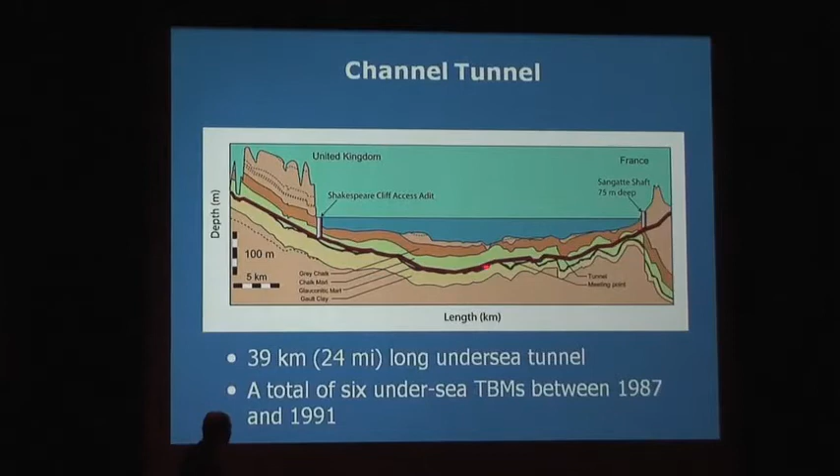I'm going to talk about the Channel Tunnel because I spent a lot of time in France and England making what was really a very, very treacherous and very difficult project come through actually on the original schedule, having started late. But this shows that we have other geologic sections, but it was a 39-kilometer tunnel under the sea, and then there were sections of the tunnel under the cliffs on each end which were not under the sea. So our machines had to do this section here, both from the British side and the French side.

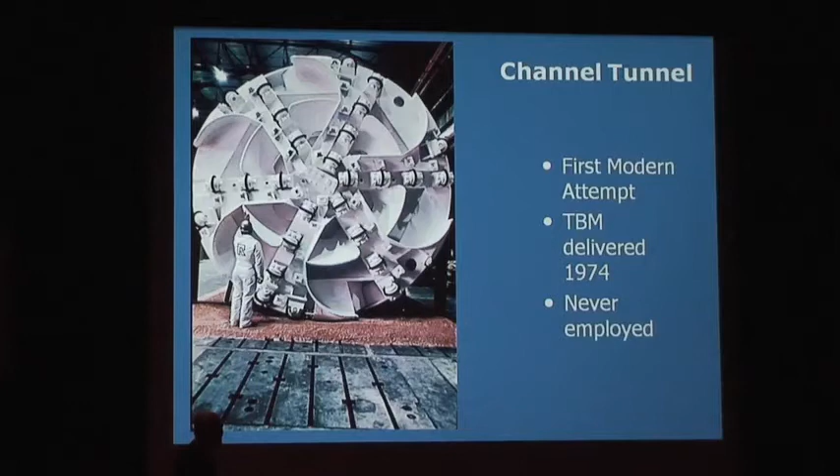In 1974, we built the first modern tunneling machine for the Channel Tunnel. This was an early double shield machine which used cast iron segments. It was all set to go. We had it at a portal on the French side, a French-German joint venture, and then the British decided that they couldn't afford to fund this, so the British government pulled the plug on the job. It would not be done. It was quite clear that the Channel Tunnel would not be built with either the French or the British governments putting any funds into it at all.

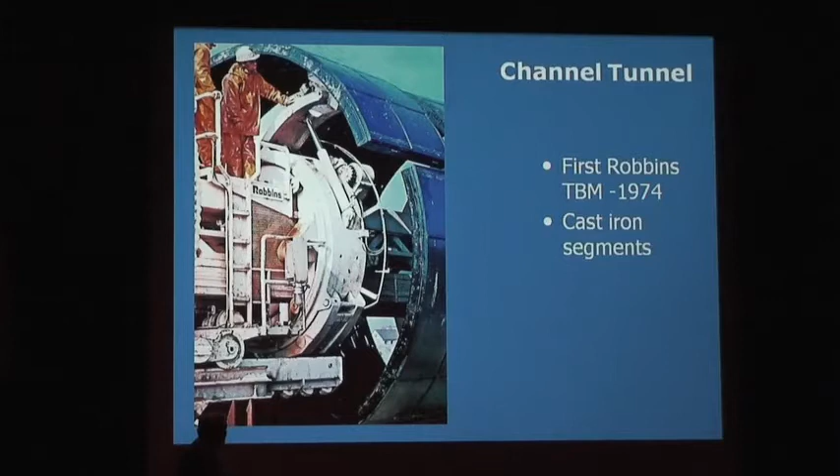So they let a contract in 1986. That's the Iron Lady, Margaret Thatcher, making an agreement with Francois Mitterrand to build this tunnel and accept the tunnel to be turned over from a private joint venture of British and French contractors, 5 on each side, that formed a company to provide all the financing. There was no guarantee that this tunnel would be a financial success.

My 2 kids at one time had shares in this tunnel. All of the shareholders basically lost their entire investment. The contractors lost all their investment in this project. There were 115 big international banks that provided billions of dollars for this project in construction financing. They wrote off all of that, and so it was really not a financial success at all. But the government extended the term of ownership of the tunnel for the contractors, so they're gradually getting paid back and paying back some of the debt to the bankers.

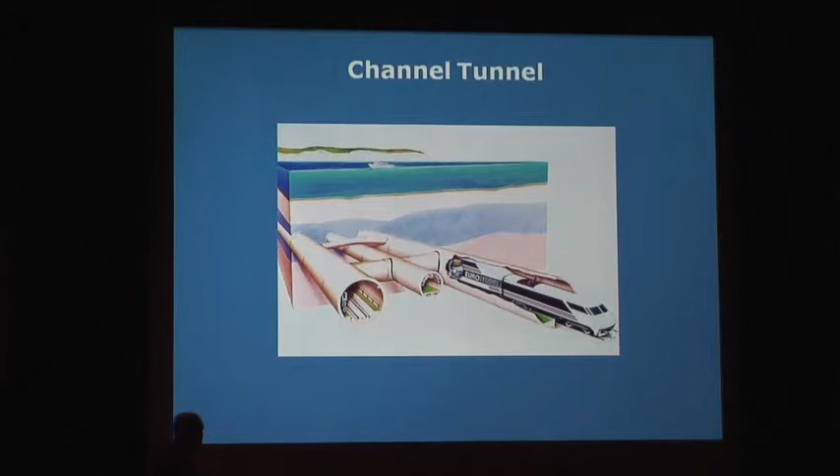The design is just like it was in 1974 when we first started. 2 main running tunnels, one going east and the other going west. A service tunnel was in between, which, as I recall, is about 15 feet in diameter. Or was it 18 feet? And then crossovers, air tubes, pressure relief tubes, relieving the high-speed train pressure from one tube to the other, and then connections for emergency escape. In case you had a fire in a tunnel, the train would stop and the people would get out of the train and go into this service tunnel. So it was an escape route as well. That happened actually about 6 years after the tunnel was put into service.

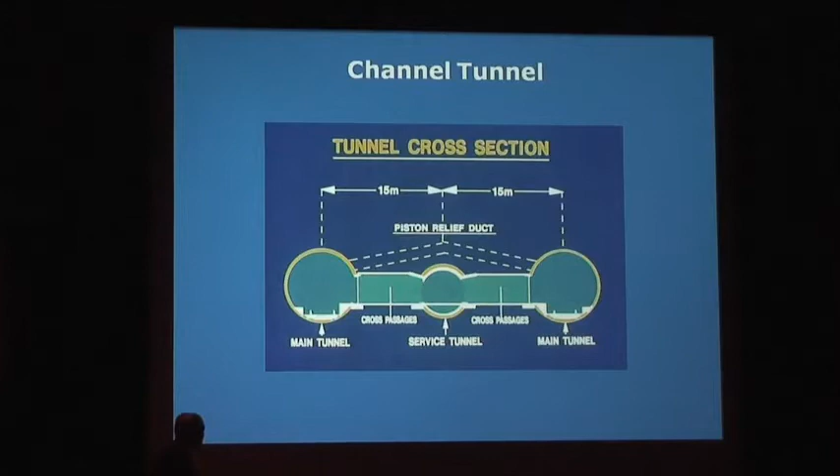So this is the tunnels, 15 meters from the service tunnel in the center, with the cross passages and the piston relief duct over the top. The first machine we built was the 18-foot diameter service tunnel machine for the French side. And this was built in Seattle and in Portland. We finally assembled it in a factory in Portland so we could ship it from there.

The pressurized, oops, go back to that. The blue section is under very, very high pressure. And this is fluid pressure, and it turns out it's sea pressure, because up here in the front and all around the outside was fractured chalk. This is the blue chalk, and the third layer down, that on the French side was directly connected to the seabed. So we had 10 bars of pressure of seawater that we had to figure out a way to, well, I'm hitting the wrong button again. We had to figure out a way to get the cut rock out of the tunnel and into atmospheric pressure, which is where the men are all working in this zone here.

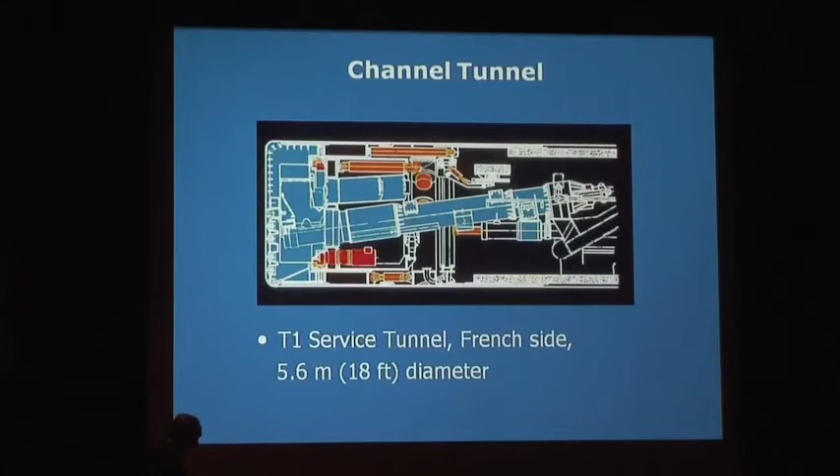That's the front of the machine. Had disc cutters and drag picks. We were able, when we got further along in the tunnel, out of the gray chalk, middle chalk, to the blue chalk, we were able to operate with just drag picks.

Moved ahead at a kilometer every month with this machine eventually. We had, oops, let me go back to that. We had probe drilling holes here. We had a gripper system here that would allow the machine to bore forward. At the same time, we were placing concrete segments during the good boring, but in the pressurized boring, we had to extend the machine with the machine standing still so they could seal it.

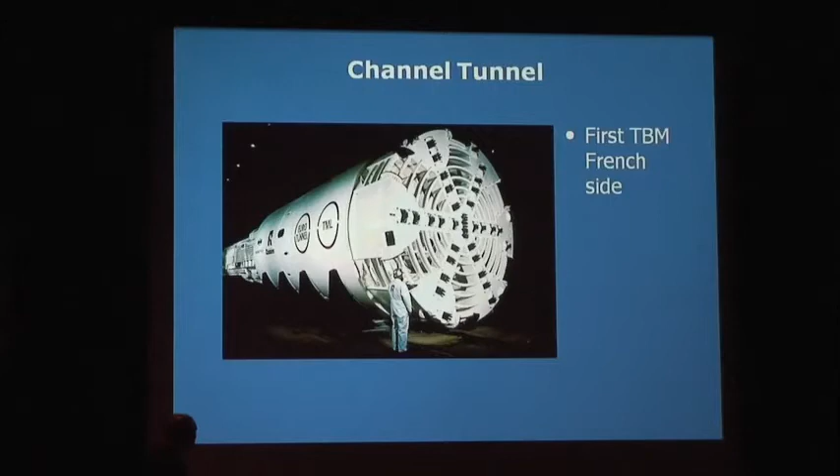This is the geology, and you can see over here on the British side, we had the upper chalk. These are the White Cliffs of Dover. We had to go through that kind of middle chalk into the blue chalk, which was a much more friendly material to be in, and stay in that formation throughout the tunneling, because it was impervious to water. So as a result, the tunnel had vertical curves all the way through and horizontal curves to stay in those conditions.

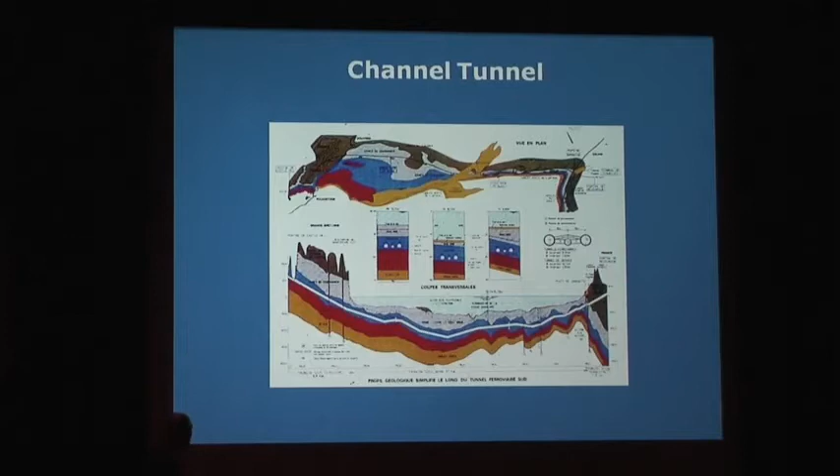So it was a really tricky surveying job, you can imagine, having two crossovers here and here, and the joint, the meeting point in the middle here, having the surveying so that the two tunnels, the two service tunnel machines that actually made the connection come together. And it was quite accurately done.

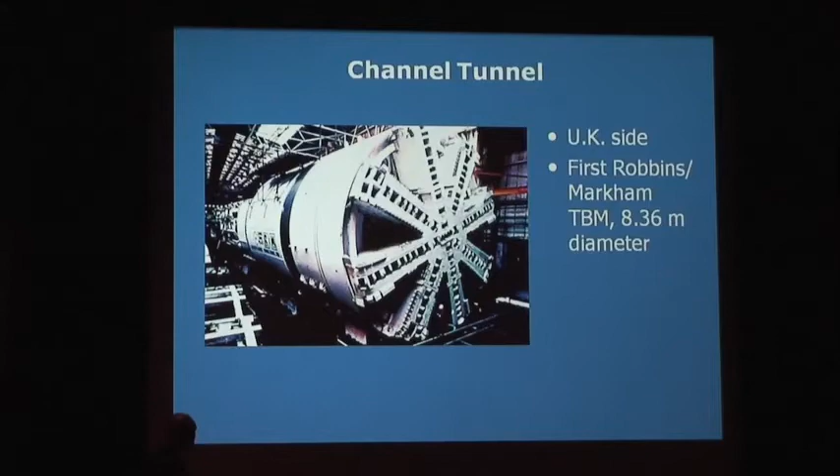This is the first running tunnel machine. It was 8.36 meters in diameter. That's 28 feet in diameter. And we built these machines with a different design than the French machines, because the British machines were going to be in that good blue chalk all the way. Their main concern was running into a survey hole which was drilled through the seabed, and they were concerned that they might encounter one that wasn't sealed. So it was capable, whoops, hit the wrong button again.

All right, and this is the machines, two machines which were built in joint venture with the Robbins Company and Kawasaki. This machine was mainly built in Japan, although we shipped some parts of it from Seattle and from Europe. And another machine of this type was built in the north of France and assembled there. But these machines had the same features as the service tunnel machine from the French side.

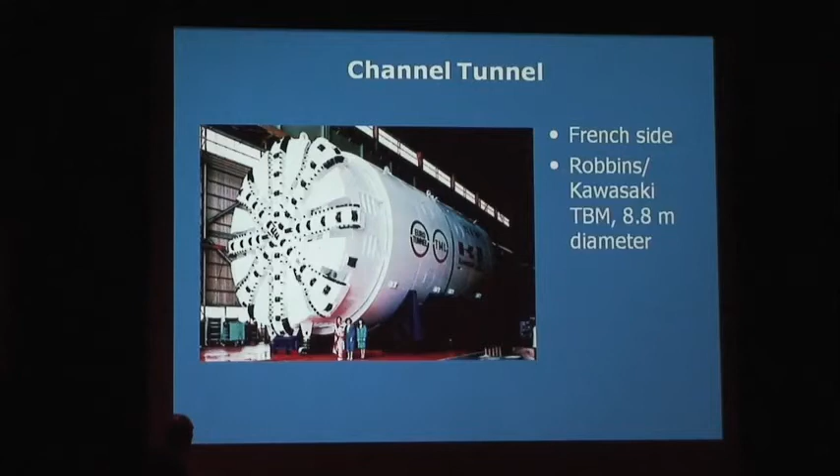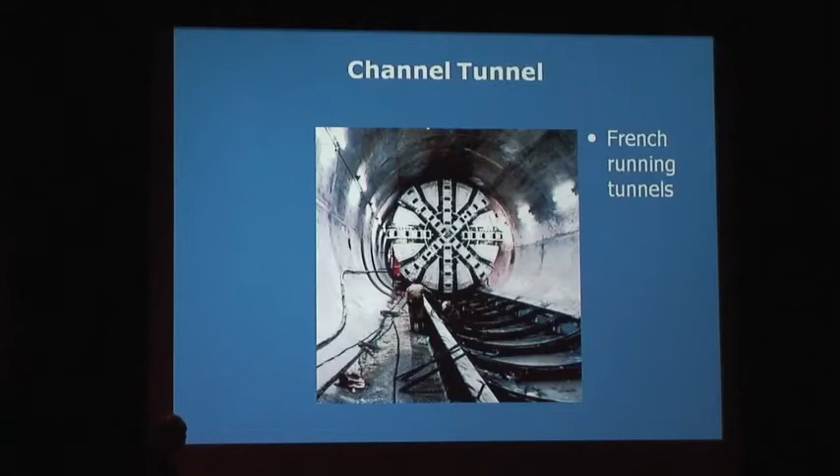Here they're pumping in grout as backfill behind the tunneling machine on the service tunnel. And this is the main French running tunnel machine being set up in the starter tunnel from the French shaft. This is the sealed segments coming in. These segments were all with rubber gaskets so they would carry that water pressure and not leak.

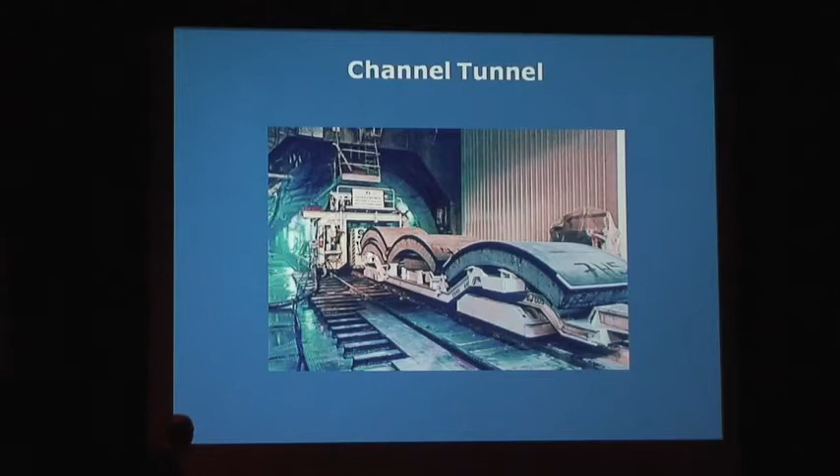The French segments were not sealed. You can see that, I'm sorry, the British segments. This is placing the British segments directly against the blue chalk, and the propel cylinders here shoved against those segments to move the machine forward.

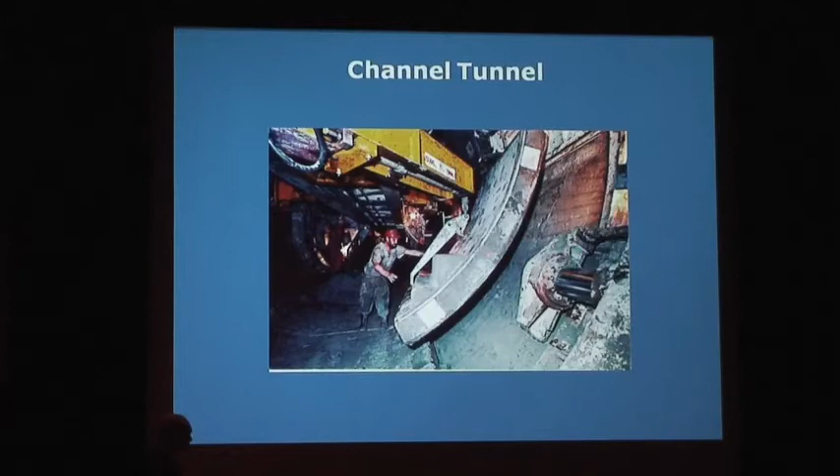Here's the connection of the two service tunnel machines. On the British side, they stopped 100 meters apart so that if there was misalignment, they could adjust the position of the machines. And they drilled a hole from the British tunnel head into the cutter head of the French tunneling machine, and that's it coming through.

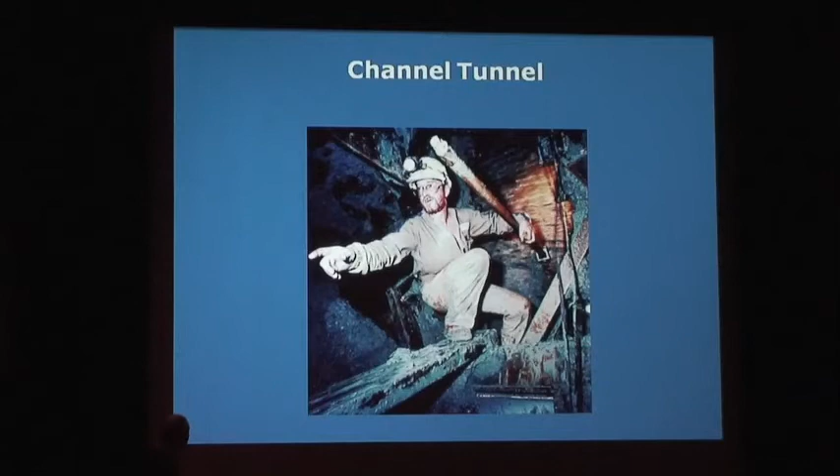And then they left a little wall in between and dug it out by hand so they could have a big televised connection party. And they picked two guys, one French and one British, to dig the last little bit with this air spade, and they came through, and let me tell you, it was one heck of a party.

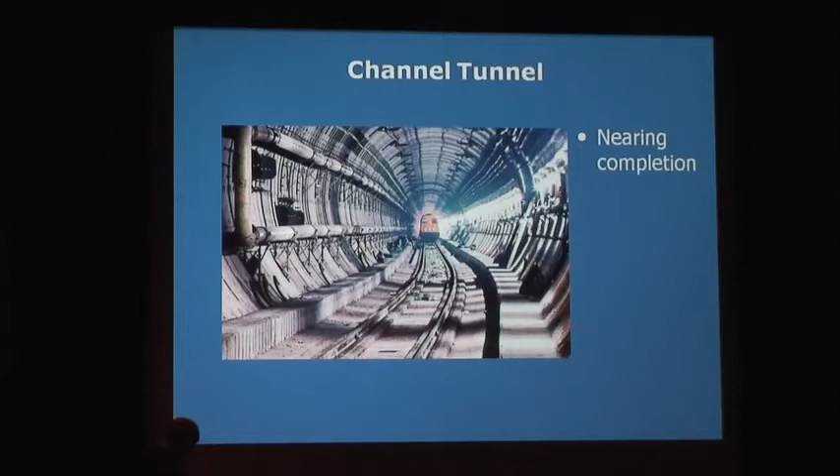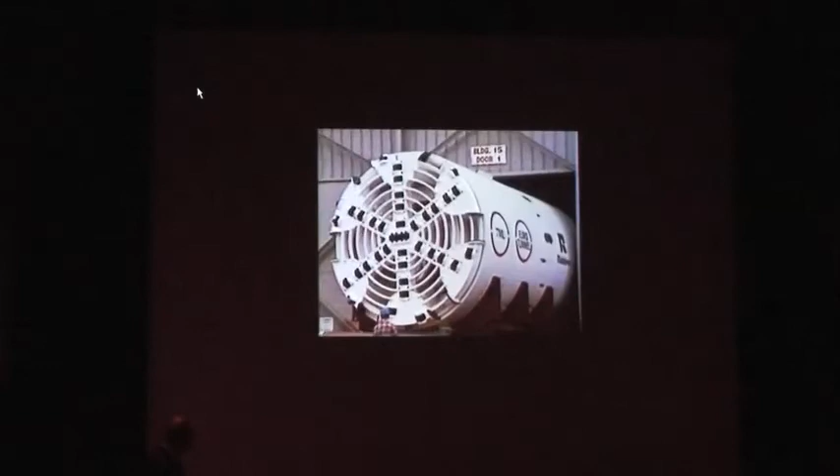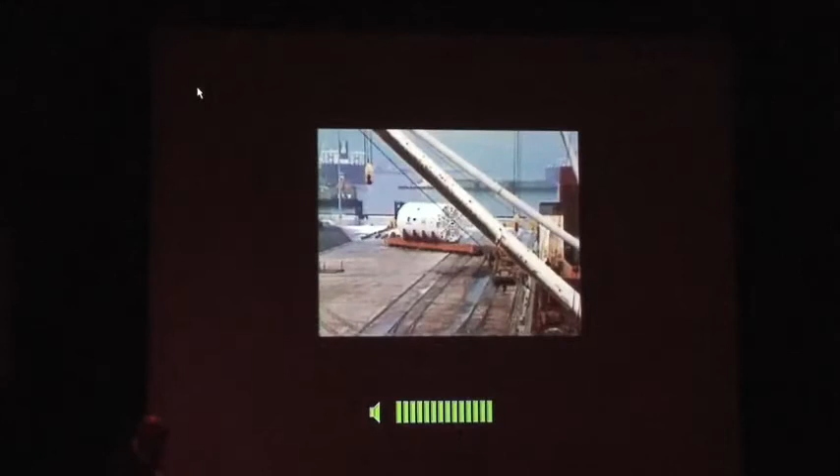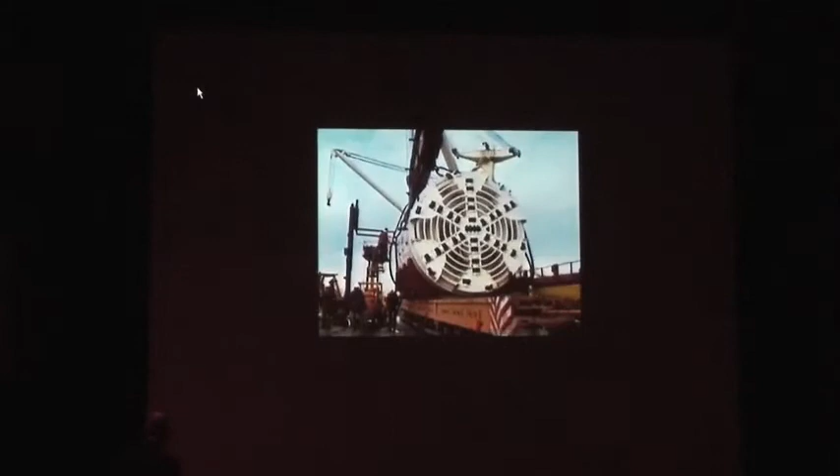There's a little video here. And I don't know whether there's... Should be sound too. How do you do that? Oh, okay. I guess that's me talking. Oh, we can do it without sound. Yeah, I don't know why it's not. It's worked for everything else. Yeah.

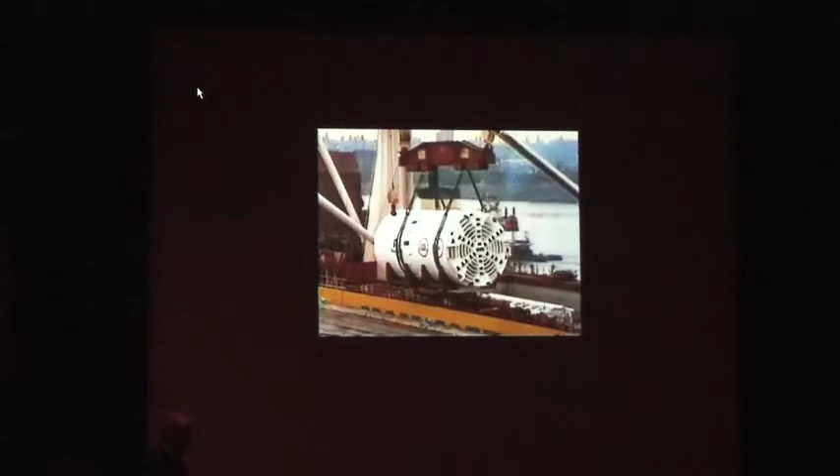Anyway, we shipped this machine from Portland, and they made quite a big deal about the fact that my father, Jim Robbins, was a consultant for one of the earlier attempts to make this job go forward, and visited the French tunnels, which were where the Beaumont machine had bored. And so I was able to go there and see those tunnels as well. The machine came through the Panama Canal, and it's being unloaded here. This is the first service tunnel machine.

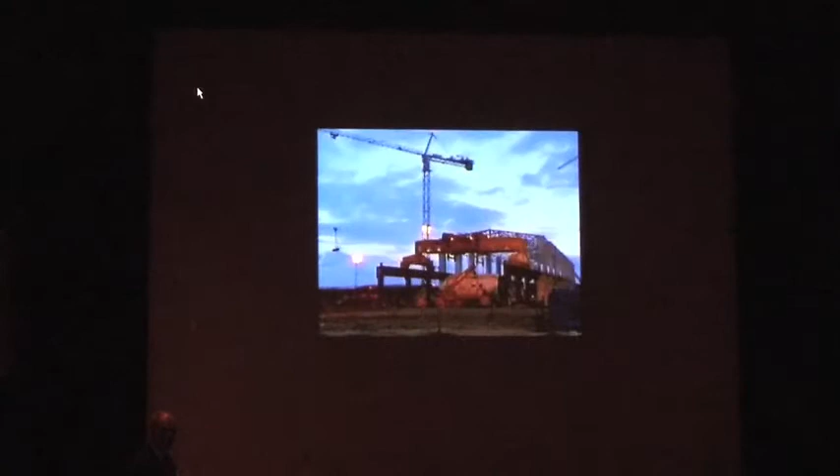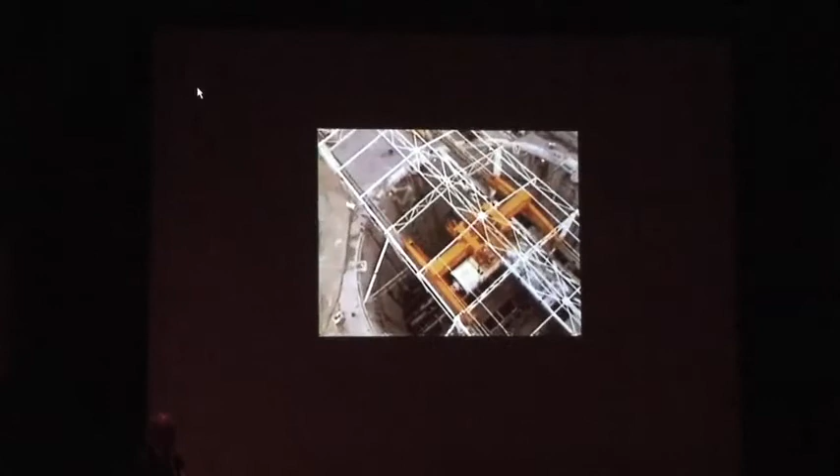The crane that lowered this machine down the French shaft had to lower the running tunnel machines, the Kawasaki Robbins machines, which weighed 450 tons, down a shaft that was something like 350 feet deep. And so you can imagine the equipment that was involved in this job. A lot of this is transporting the machine to the site.

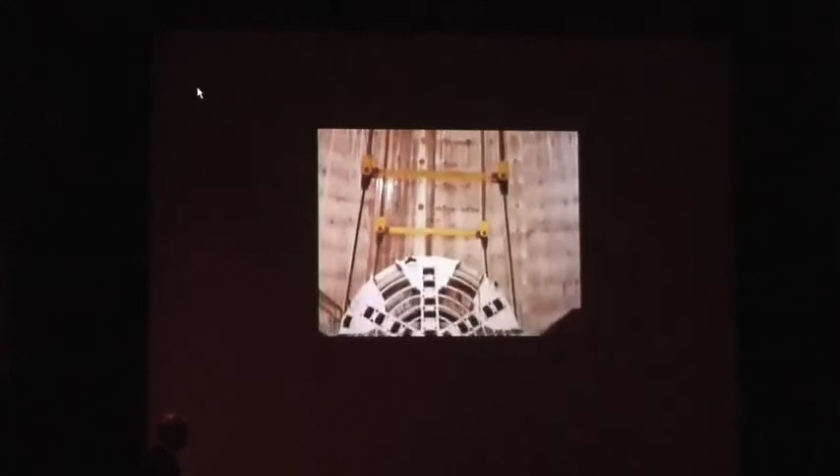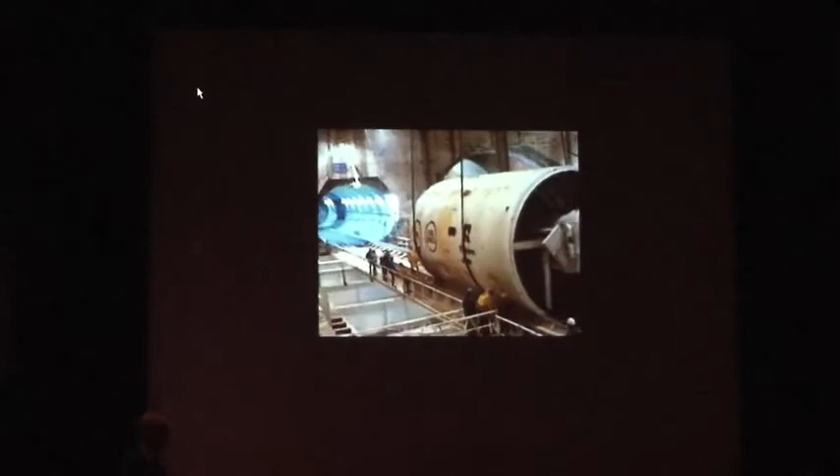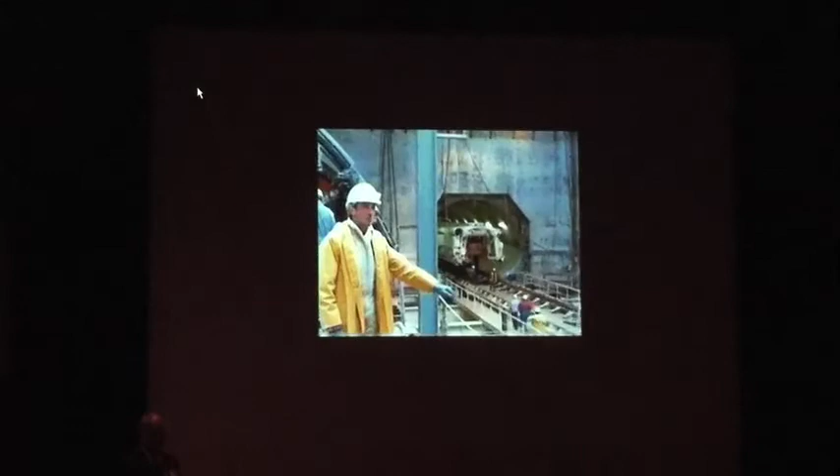One of the interesting things about this was that the machine, the backup system, and the machine itself on the French side was designed to operate as a slurry tunneling machine in case we had to pump the muck out instead of working with the piston discharge system which we developed. It was the first time a concrete type pump with half-meter diameter pistons was built, and I must say there have been others like that, but much smaller since that time.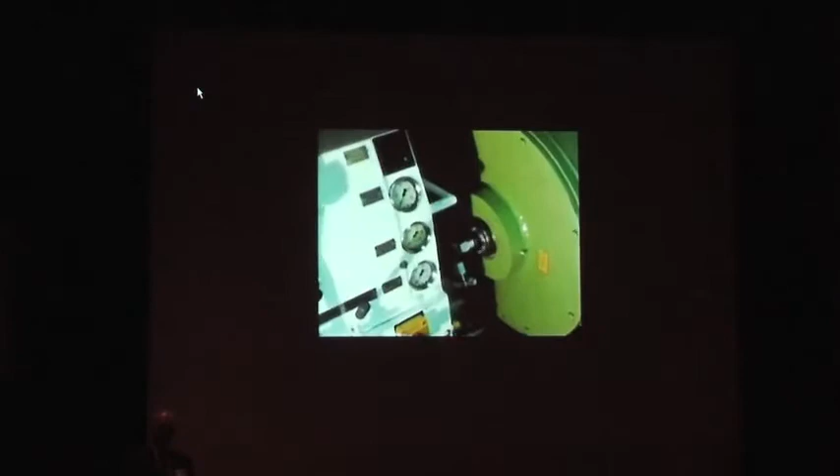So we spent a lot of time in the tunnel. Interesting thing about this job is that almost everything that could fail on this tunneling machine failed in the first 2 kilometers while we were in the very bad ground.

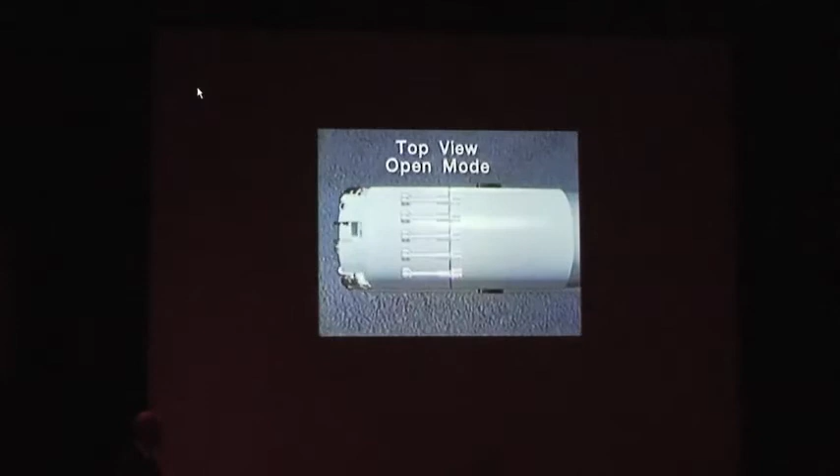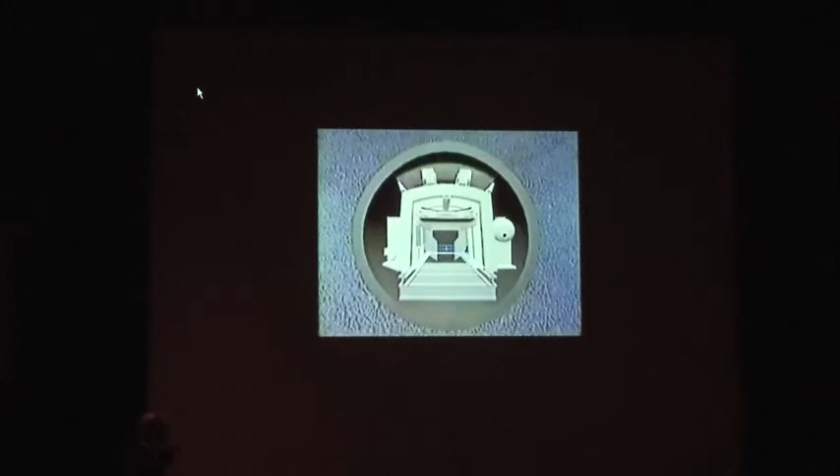This shows these features of the cutter head extending and the piston discharger operating, the grippers, the segments coming in over the top, being erected with these vacuum pickup systems to place the segments. This is very much like your standard slurry or EPB type machines.

I think these may have been the first vacuum pickup, which was a question Shani asked her people in her news item, but that might have been the first one.

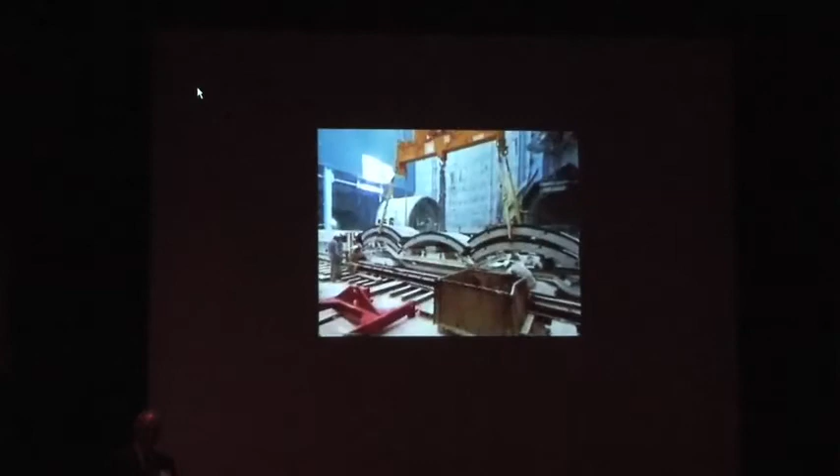So the French were managing this machine, which was started way behind schedule because we were late shipping it, and then everything on the machine broke, and we repaired everything in the tunnel piece by piece, electronics, the main screw and everything. We got further behind. We were about 9 months behind schedule.

And I made a bet with the contractor, the manager of the whole project, that we would finish this job on time. And if we didn't, I would take him and his top management team to the best Paris restaurant, which we had worked on for years before that. And if we finished on time, he'd take us. And he ended up taking us to dinner.

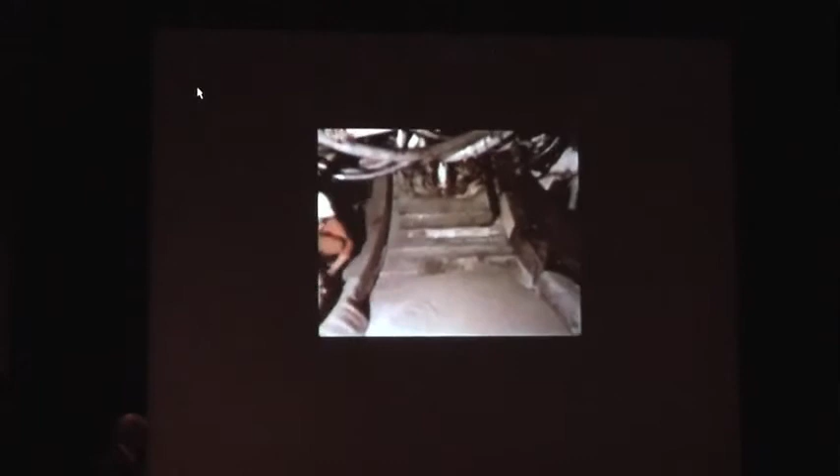It was quite an experience because the French managing director was decided to be laid off, and they didn't have anybody to replace him. So the project manager on the French side said, "Okay, Robbins, you have a chance to put your money where your mouth is. You're in charge." And he let us take our project manager, and he managed the entire French shaft from there all the way to the middle. And it was a mistake that we didn't put him in charge in the first place.

But it was luck, because by that time, everything that could have failed had failed and been repaired, and the machine took off at that point. So it was one of those lucky deals. We were given a very, very substantial bonus to complete the job on time. And when we finished the job, we ended up with a big profit.

But when we shipped the first machine to Sangatte, to the French shores, we shipped it at just double the amount of money that we contracted with them to pay us for it. So I bet the whole company on that job. And our bankers told me, "Well, you can make this one bet, but that's the end, and we're bailing out." And we had to get a new bank after that. So that's the video.

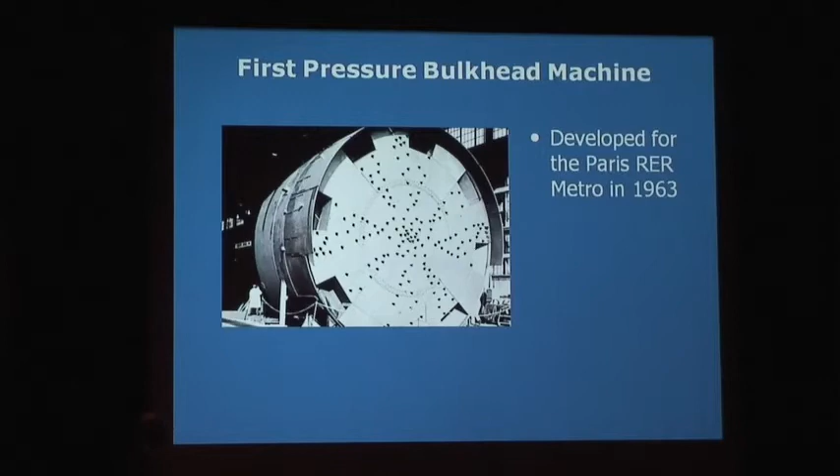I thought I would talk very briefly about other important jobs. This is the Paris RER Metro in 1963. This machine was the first machine with a pressure bulkhead, and this had the compressed air on the face that lit Paris on fire. And we were able to finish that job. Again, you can see sealed precast segments. There were other features you wouldn't believe.

This machine, they built a ring of segments from bottom to top continuously. When the machine had moved forward far enough to start build again, it was ready to open. The segments on the bottom were advanced, as you can see here, one whole ring ahead of the ones on top. So the machine actually was a shielded machine that could move continuously forward.

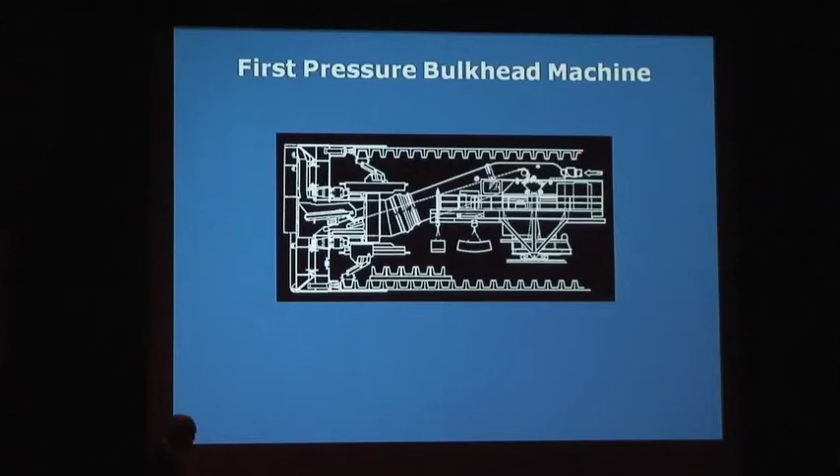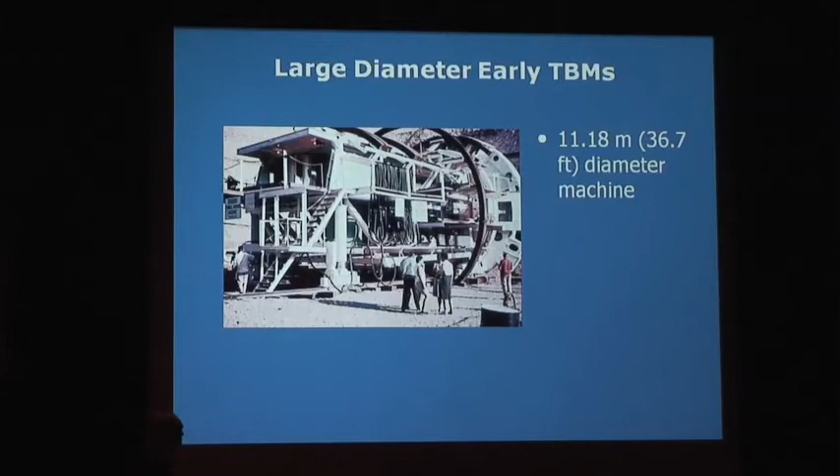The same machine we took and shipped from Pakistan to the Mersey River, and this is the next successful tunneling machine. They put a little pilot tunnel through first, and then the machine was used as a reamer to ream out that pilot tunnel.

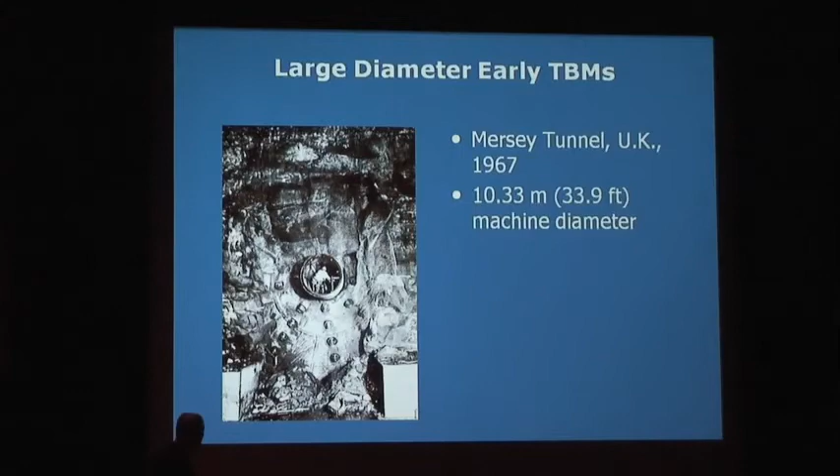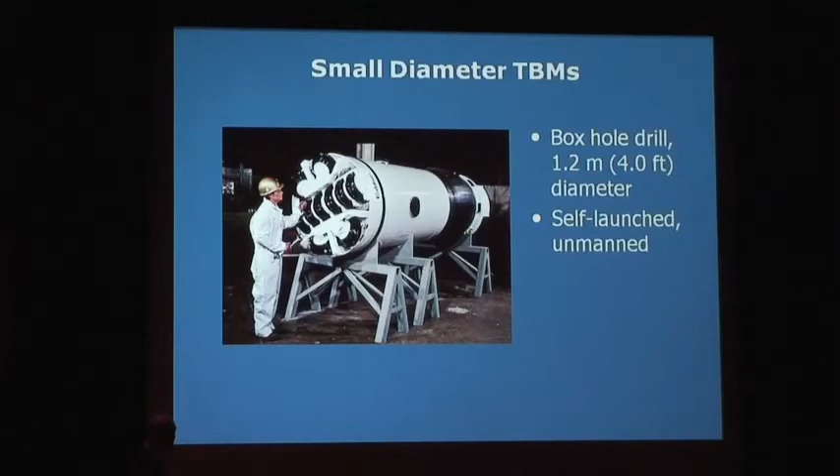And talk about small diameter, here's a 4-foot diameter tunnel in South Africa. This was a box hole drill. So it gives you an idea of how small some of these hard rock machines can be.

These are machines that didn't work. Here's the first walking gripper machine that was designed to walk itself continuously down the tunnel. Whoops, I keep hitting the wrong button here. These shoes, every other one would grip and shove and then relax and go forward and grip and shove while the other one was moving forward.

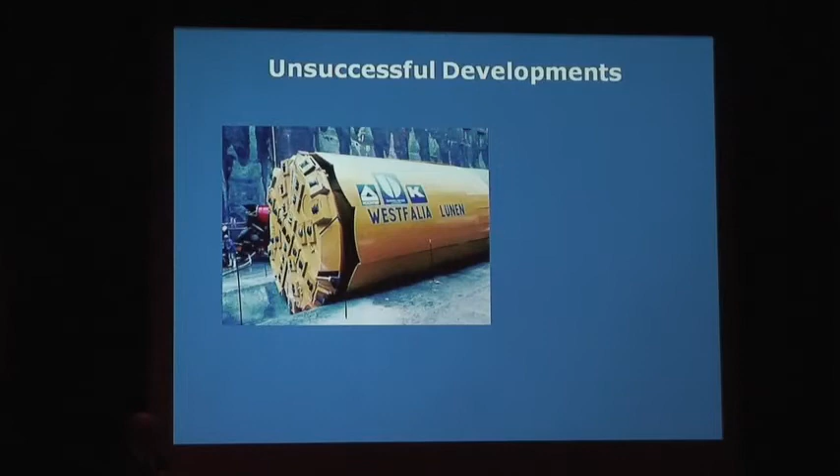We didn't have the electronics and we didn't have the hydraulics and the valving systems in those days to allow this to happen. Today it's my hope that we will make this type of machine succeed. That was a little 7-foot machine. The Germans built a similar machine with walking grippers. This one did succeed, but it was the only one they ever built. And so the advantage really wasn't there.

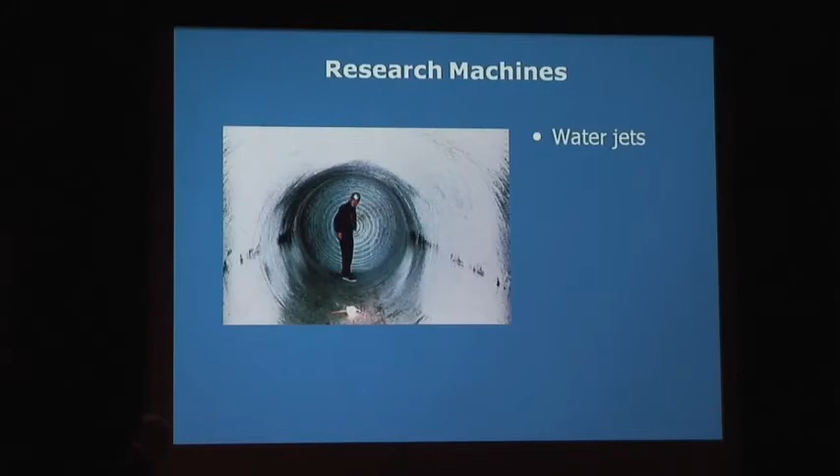Here's a hard rock tunneling machine boring a granite tunnel. In fact, it was a 7-foot diameter remake of that first little walking gripper machine. And we used high pressure water jets, 60,000 psi. You can imagine, 4,000 bars to cut granite.

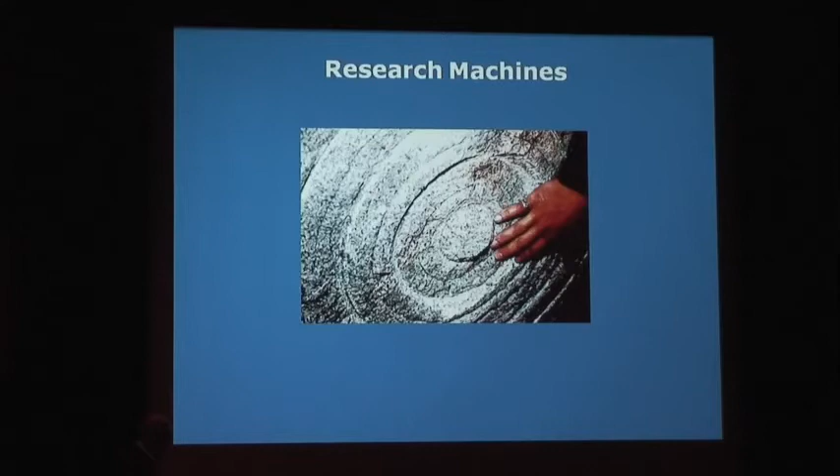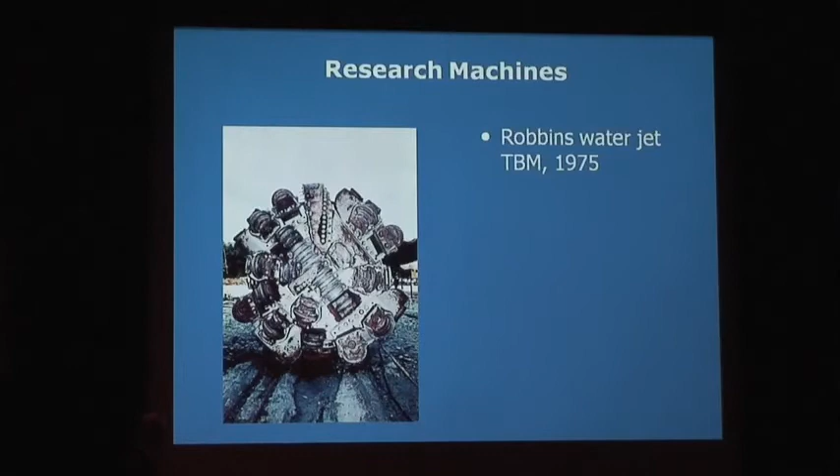There you can see the water jets here, the array of jets. And the idea was that the jets are supposed to make grooves in the rock that the disc cutters would break the rock into. But the disc cutters worked a lot faster than the jets, so it really, whoops, I did that again.

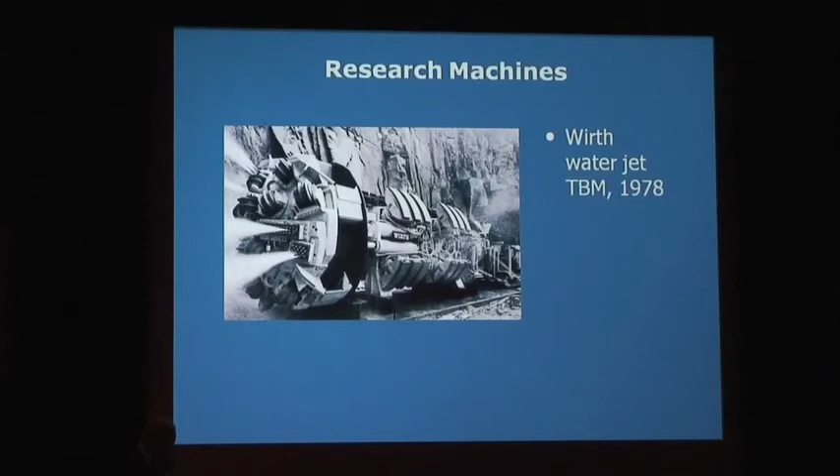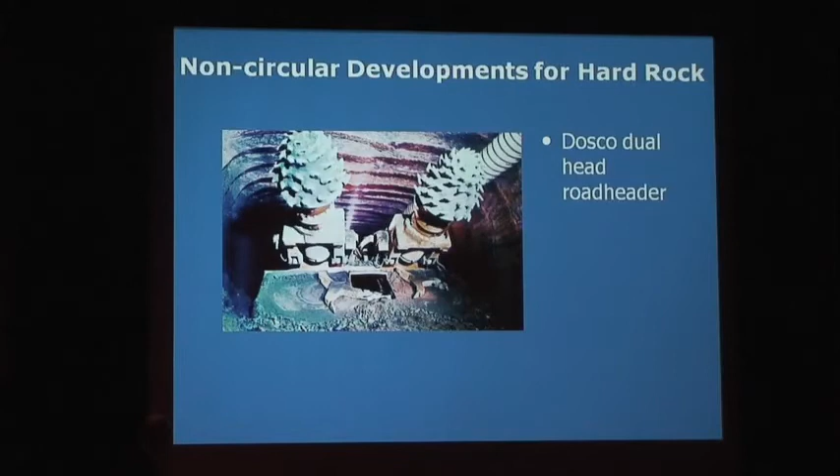The next issue was making non-circular tunnels for underground mining. And this is soft ground, a very powerful double road header for making a non-circular tunnel. And this was coal mine tunnels in England. And that's certainly something you can do with this type of cutters in soft ground. In hard rock, you just simply can't do that.

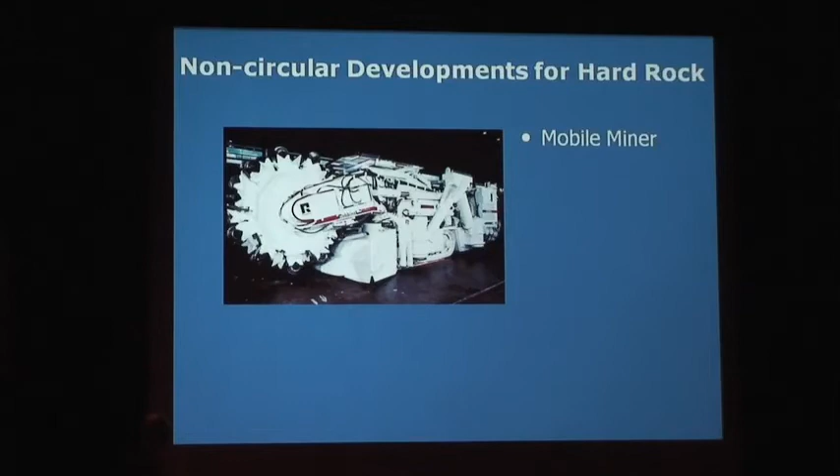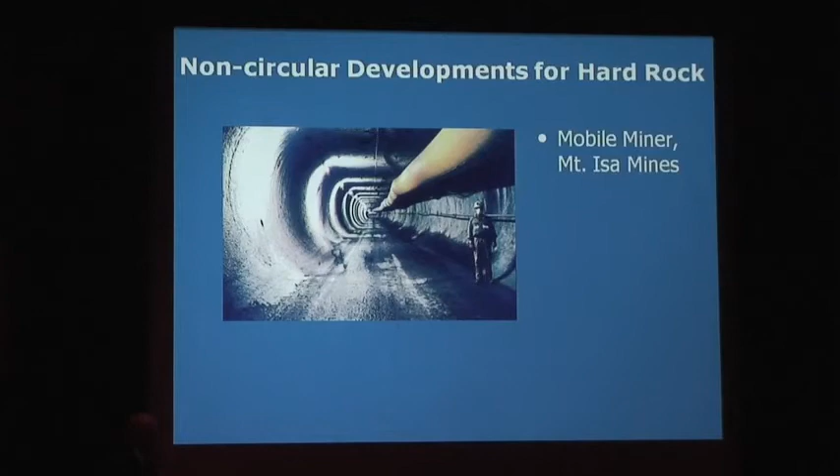So we invented a new type of machine with the cutters just on the periphery of the head and arms that swing back and forth that allow you to cut a tunnel of this shape. This is Mount Isa Mines in Australia. Very, very hard quartzitic rock. And you can see we did quite a bit of tunneling. This is also in Mount Isa. This was at the Pasminco mine in Australia.

In this case, our customers, these two mining companies, each spent about $25 or $30 million on these developments. The Robbins Company spent almost that much as well, and we still have not produced a machine that can do this kind of non-circular tunneling as fast as you can drill and blast it.

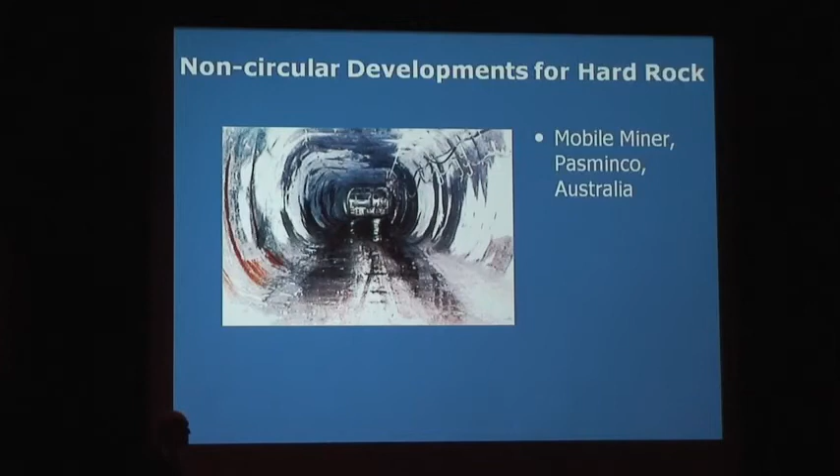So you can see that there's a big scope for future tunneling in underground mining. There's more excavation in underground mines than there is in all of our civil engineering work. So there's a huge scope for the future of tunneling.

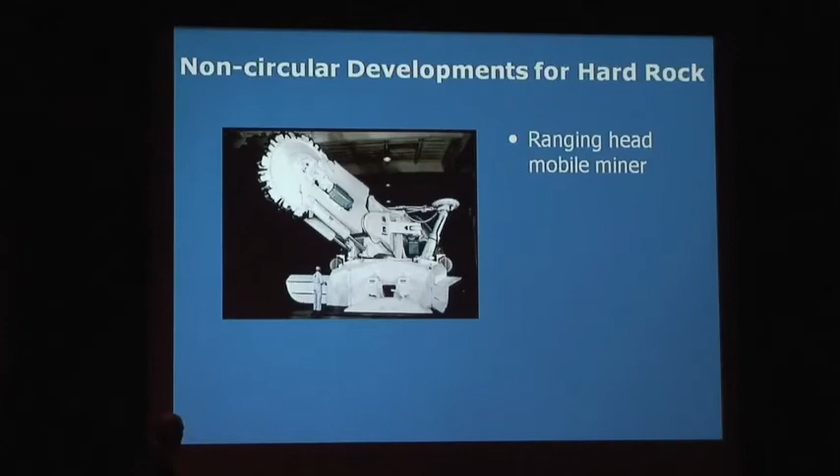And this is a machine we built for a Taisei company in Japan, and it's the same kind of a mobile miner, but a ranging head, and they built a highway tunnel in Japan with that machine. And there it is in the tunnel.

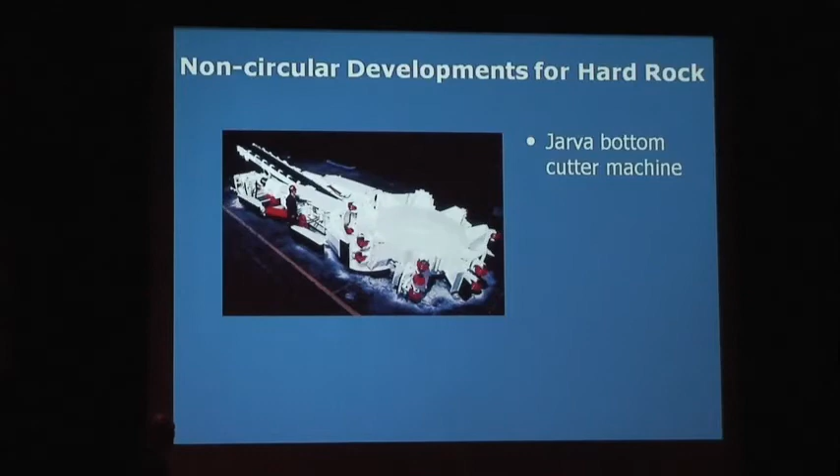So this is another non-circular machine, which was built by the Jarva Company in Ohio, and they were reconditioning the bottom of slope tunnels in coal mines here in the United States, eastern United States.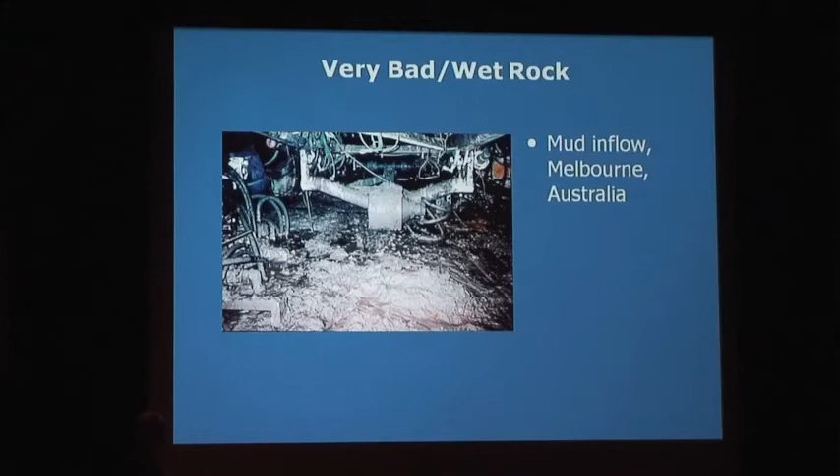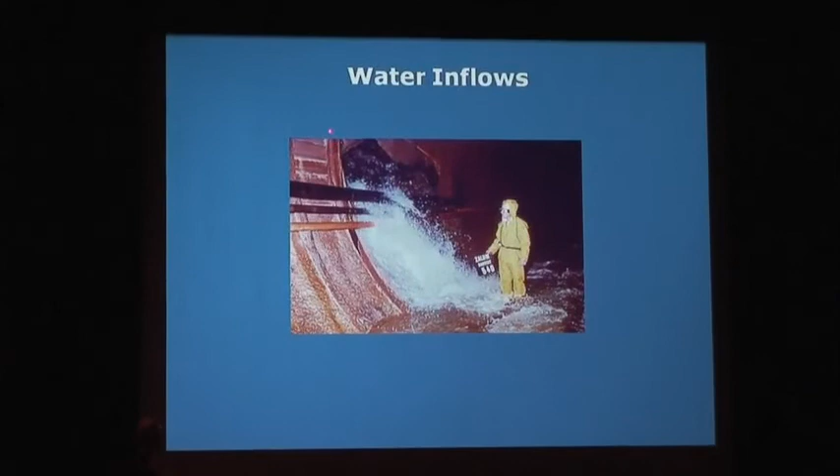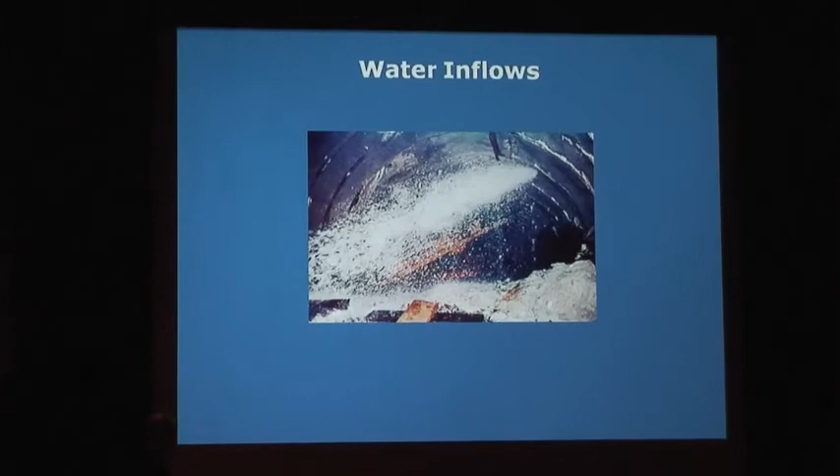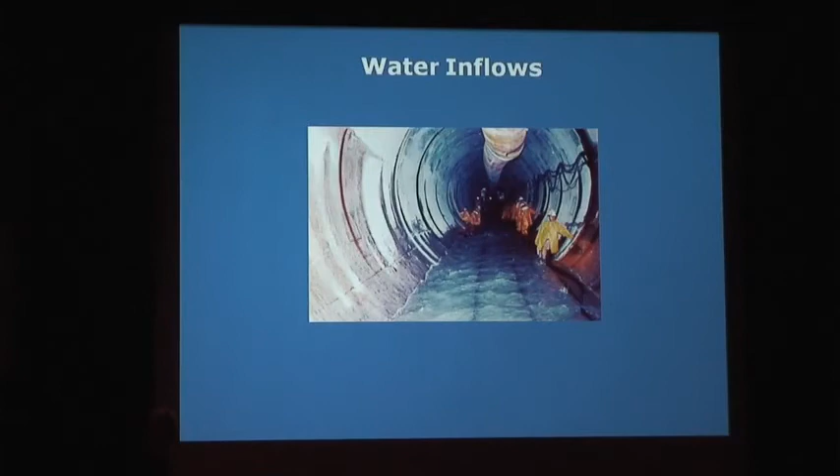Here's a tunnel in Australia. This is water coming in over the top of the machine, coming in through the walls, and you can see ring beams here, but there were places it just poured in. There's water under very, very high pressure coming in. As you can see, it dumped a lot of rock on the machine. And some places it's just a river. Somewhere I have a slide where the guy's in an inflatable boat moving around repairing parts of the machine.

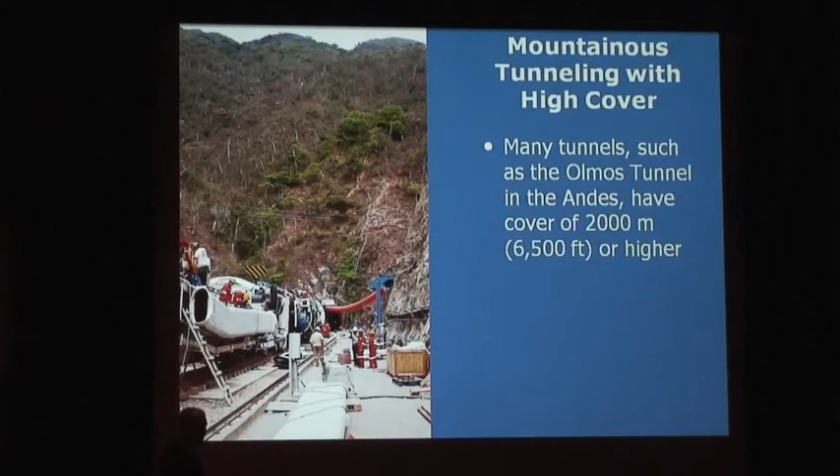So where are we going from here in the future? There are many concepts. One of the problems, it's like this job in the Andes, you're tunneling under cover that's sometimes 2 to 2.5 kilometers under the top of one of these mountains. And the rock pressure and rock temperature is so high that the pressure is greater than the strength of the rock to support it. And so you get rock burst like the deep mines in South Africa, where the very, very hard rock fails with rock burst. It's like an underground earthquake, and a very, very dangerous condition.

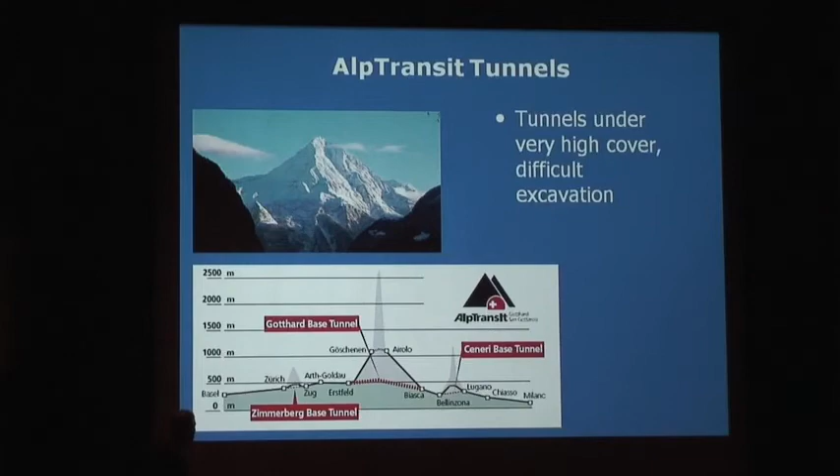So when the rock in the ground is not so hard, it actually squeezes. And we see that happening in a lot of tunnels in the Alps. So you needed to have a concept that can convert from a standard machine here, open gripper type machine, to one that will handle squeezing conditions. There are several different concepts in this one machine, but you can convert it to an open machine which uses wire mesh, rock bolts, shotcrete right up at the face, even drilling holes in the face ahead of the machine.

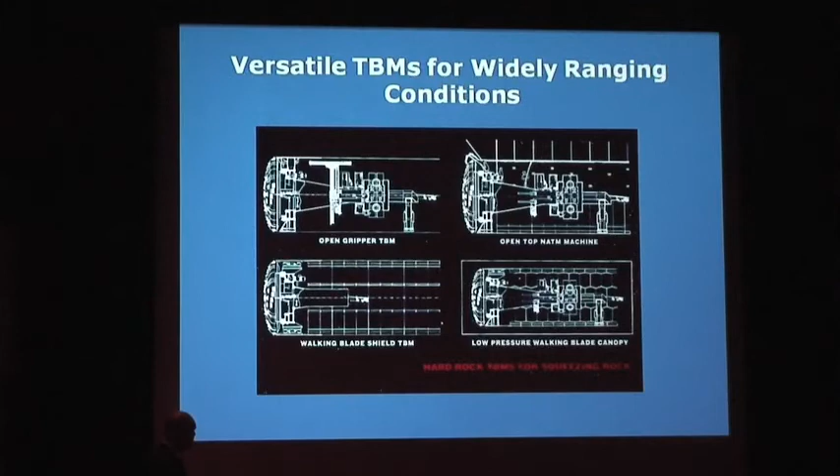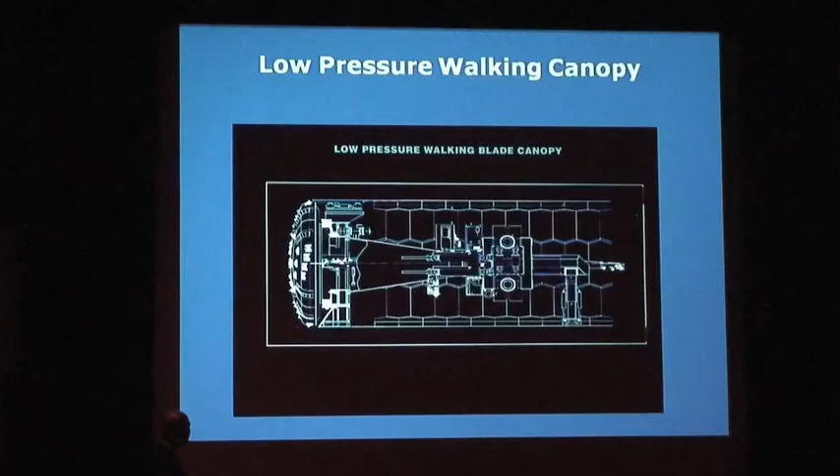You can have a walking blade, continuous advancing machine that will allow the outside of the shield to actually get smaller as the ground squeezes it. And the same thing can happen with lower pressure conditions with a gripper system working on the inside of precast segments. So this is the open top tunneling machine, and the low pressure or the high pressure walking blade shield that allows the ground to just get gradually smaller as you put in yielding type of segments.

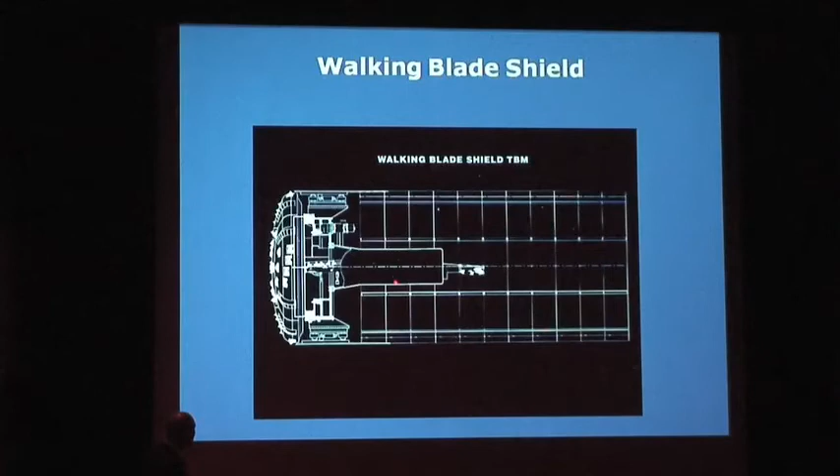And that's what such a machine would look like from the rock's perspective, one that will actually handle squeezing ground. Now this won't handle those big water flows, so we haven't figured that out yet. There's a lot of room for doing new things still that we haven't done in mechanized tunneling.

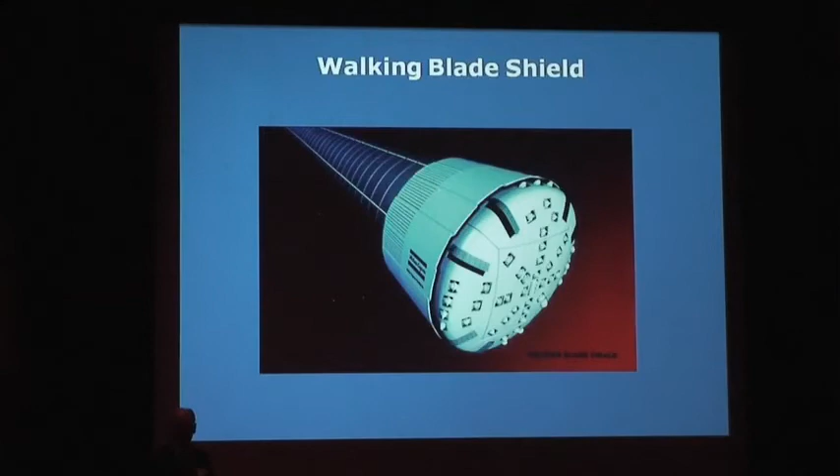So if you have any questions. One of those clients is a joint venture group that, well, in fact, there's two or three that I'm aware of, that some of the contractor customers of ours have said, we're just not going to bid that job. We know that we're going to get into big disputes with the owner of the job, or their consultants who designed it. So that's a job that we're just not going to participate in.

That's a serious problem, and the big tunnel that's going to come along now in Seattle is of a size and conditions that we think there may be only one or two bidding joint ventures for that job, and maybe three potential suppliers of the tunneling machines. So right there, you're digging yourself a hole. If they could have made that a pair of much smaller tunnels, they would have found also better geology, and you would have had all kinds of manufacturers of machines and contractors bidding the job. So a lot of it is a political issue.